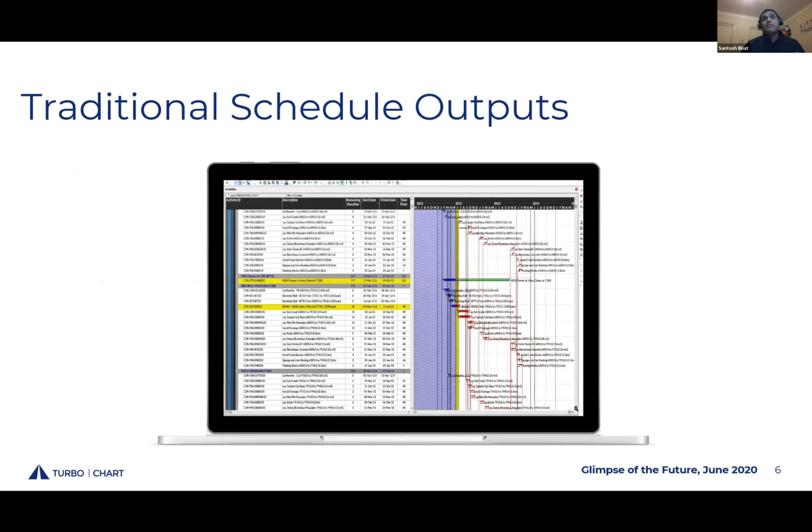It gets worse. When asked to deliver a schedule to someone who's not at a desk or hasn't got access to the software, this is what we do. We print out pages and pages and pages, and we ask them to review it, to analyze it, to understand it, and get back to us. It's a recipe for disaster, because unless you've got a very good understanding of how to interpret schedules and Gantt charts, output like this is not going to be very meaningful.

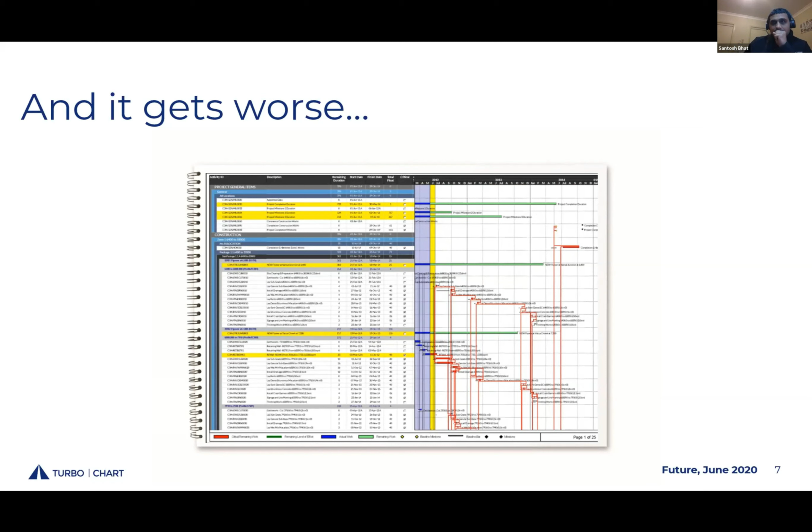However, and thankfully, on linear projects or linear infrastructure projects, there is an alternative method that addresses a lot of these problems and can help improve communication and analysis.

So let's step back a little bit. What are linear projects? Classic examples are shown on the screen there: highways, tunnels, high-rise apartments. Yes, high-rise buildings are linear projects in a way. Railways or pipelines as well, all considered as linear projects. They all share a similar characteristic where there's repetitive works, repetitive sequences of works that progress along the linear element of the project.

And they also interact with the more static elements. So that's a key element to think about as well. Linear projects have a very special factor to them. Let me explain that a little bit further.

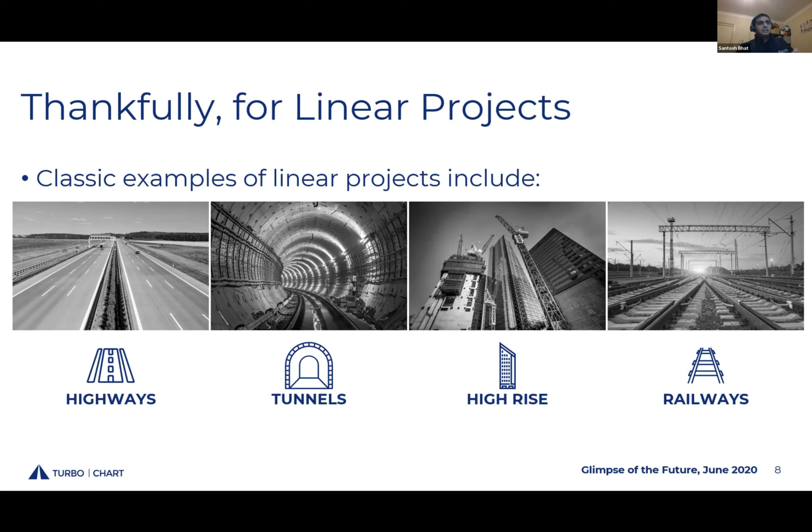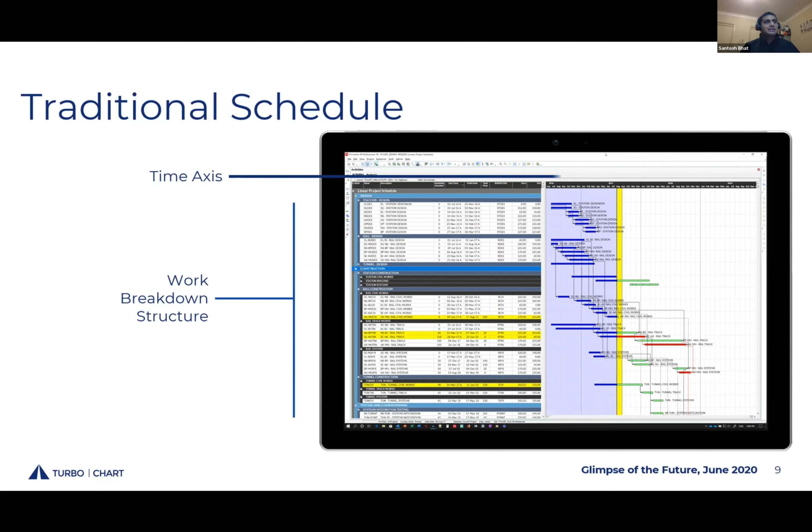When we think about a traditional schedule or program, this is what we see: a Gantt chart. It has a time axis that runs across the horizontal, and the vertical is usually some sort of work breakdown structure, a hierarchical way of organizing activities. You'll see the main features of these charts: single task per line. It's very hard to differentiate one task from another. What does it mean? You've got very little hope of understanding where things are occurring unless you've got some very sophisticated way of describing, grouping, or sorting activities into clusters.

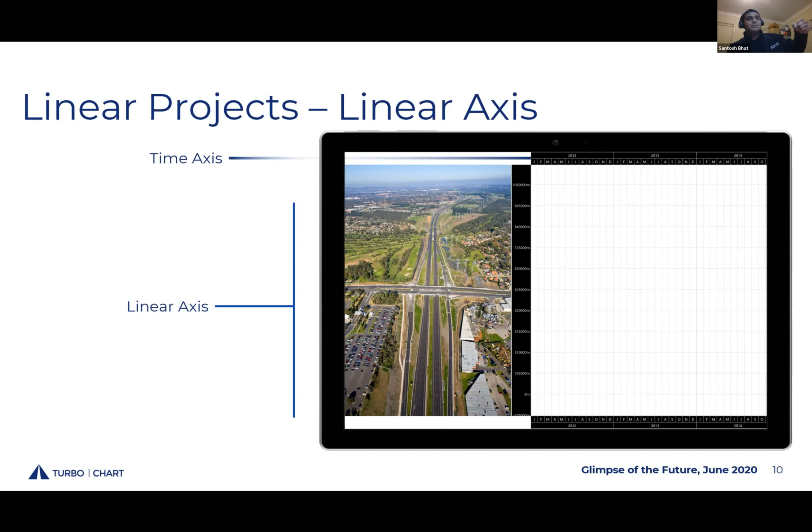So linear projects have an advantage in this space. Let's look at things slightly differently. Let's continue having a time axis across our chart on the horizontal, but the vertical axis is represented by the location along the linear axis, or the linear alignment of the particular project. If you think about a highway, it has a start and an end point, which represents that linear alignment. So let's use the linear element as the axis rather than a work breakdown structure.

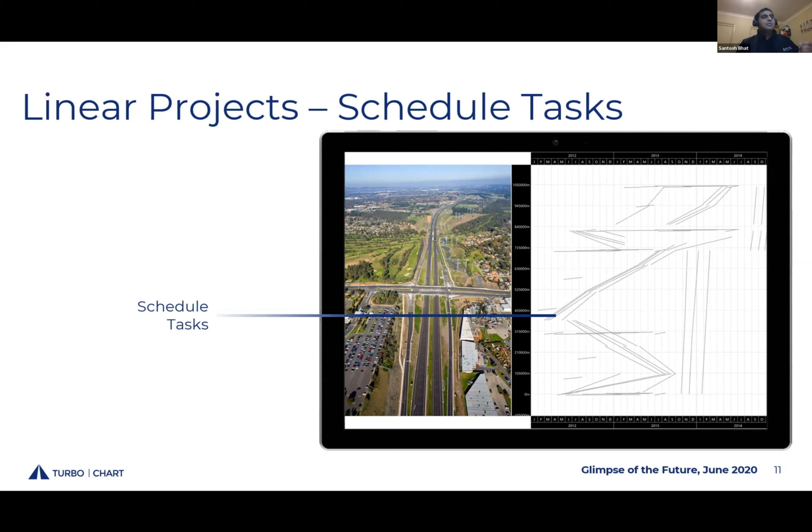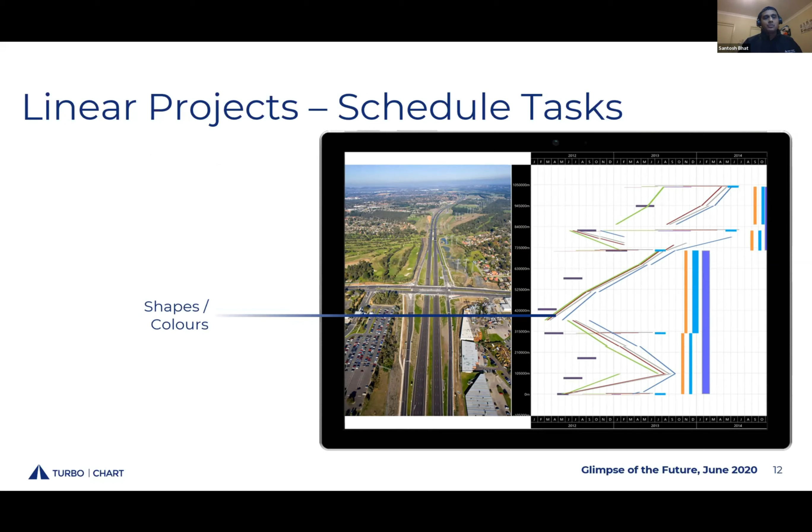Onto this chart, we can now place all our scheduled tasks or program tasks. They're no longer limited to being one per row, but they span over the time and location that we're specifying they occur. We can then use different shapes, colors, or styles that represent the actual type of work. So now you've got a much more meaningful interpretation of what a schedule says. You now know what's happening, where it's happening, and when it's happening.

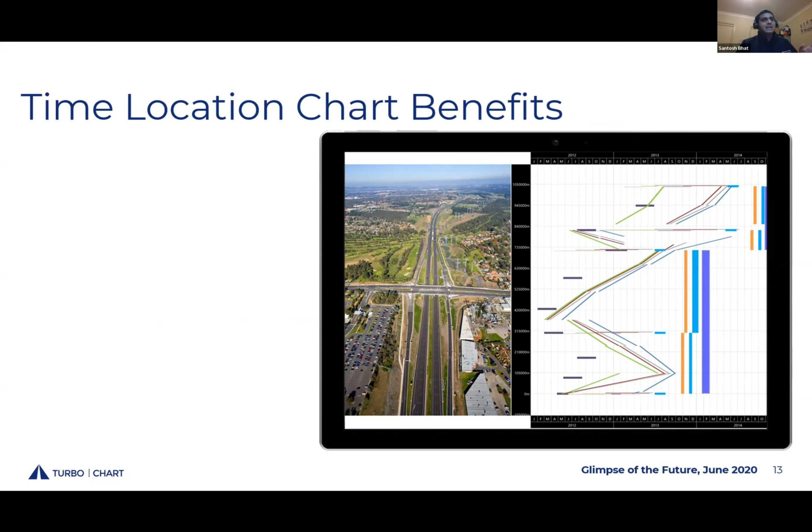So let's spin it around a little bit. Because the horizontal or location linear axis tends to be a bit more interesting, we tend to look at these charts in this orientation, except for vertical high-rise buildings, which are a slightly different way of looking at these charts. This is a typical time chainage, time location, linear schedule with the axes and the activities and tasks all being displayed.

What are the benefits of these charts? Very quickly, you can start identifying work and crew sequences. Where are the work crews operating? Which direction are they heading in? What's their rate of progress? The angles of the lines you see on these charts mean the speed that they're working at. A very shallow line means a very fast operation. A steep line tends to mean a slow operation.

We can also pick up things like clashes and errors, where lines intersect, or where there's multiple activities occurring in the same space and time. You can beg the question, is this feasible? Can we actually be doing this, or have we made a mistake in our schedule? In which case, you may need to revisit the way that the schedule has been constructed.

It's also possible to do schedule comparisons using these type of charts. If you think about comparing schedules, and we heard from DJ earlier on, getting involved in a lot of delay and claims type analyses, you want to understand what was our originally intended schedule versus what are we now able to achieve. These charts can be used for that as well.

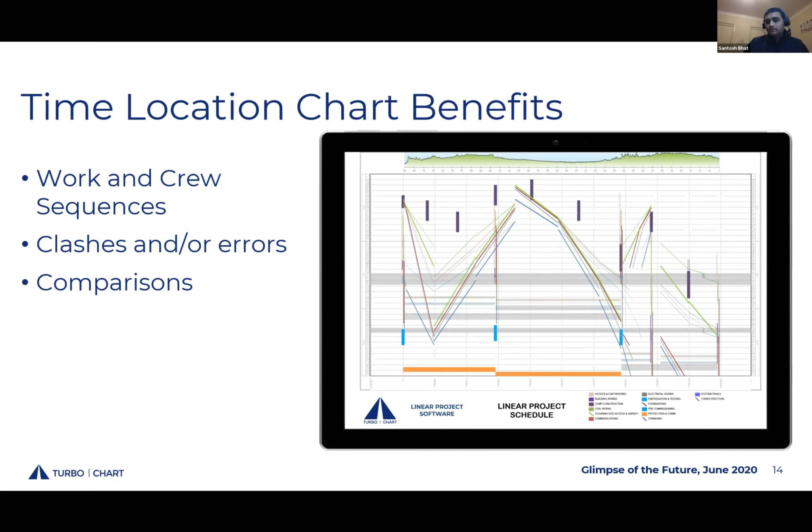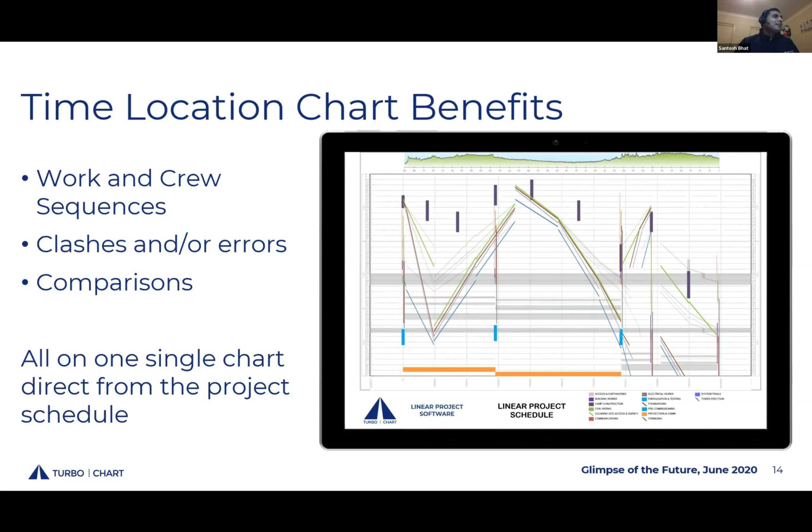So that's a bit of background. I want to talk a little bit about the main selling point, obviously, all on one single chart and direct from the project schedule. So I want to talk a little bit about one of the companies here in Australia. Most of our customers at present are in Australia, and a number of those companies are now making the product that I'm going to show you as their standard tool for doing this type of work.

But one particular case is a company called John Holland. They have a 70-year history across our region: Australia, New Zealand, Southeast Asia. They are a tier 1 contracting services. They operate in all types of areas around infrastructure and property development. However, they do have a focus on very highly technical and complex linear infrastructure type of projects. So there's two being shown there from our two largest cities in Australia.

There's the Melbourne West Gate Tunnel, a huge project that's worth just shy of 7 billion Australian dollars. And John Holland have been involved in the WestConnex motorway and tunnels, essentially about 30 kilometres of tunnels under suburban Sydney. Two specific projects there, multi-billion type of projects, very complex, very technical, very high risk, I might add, given all the elements of working in an urban environment.

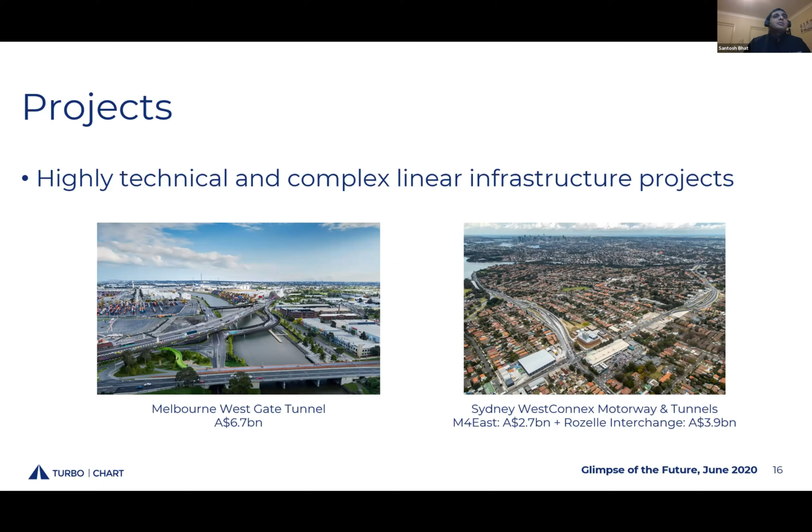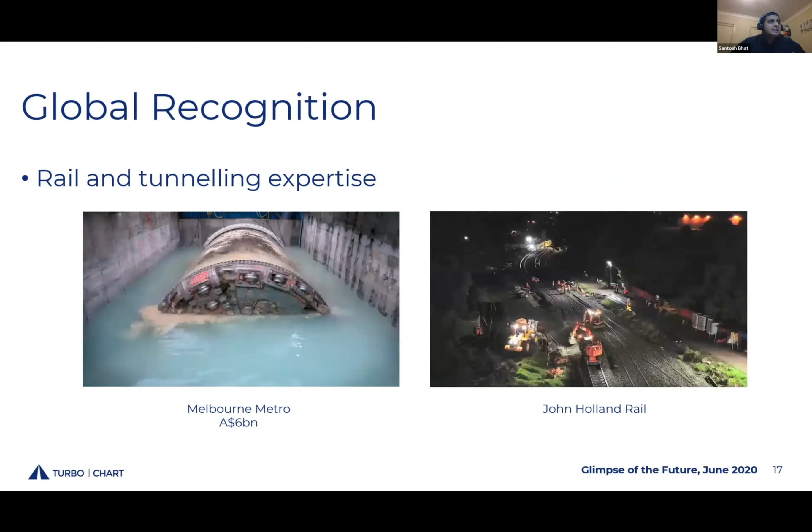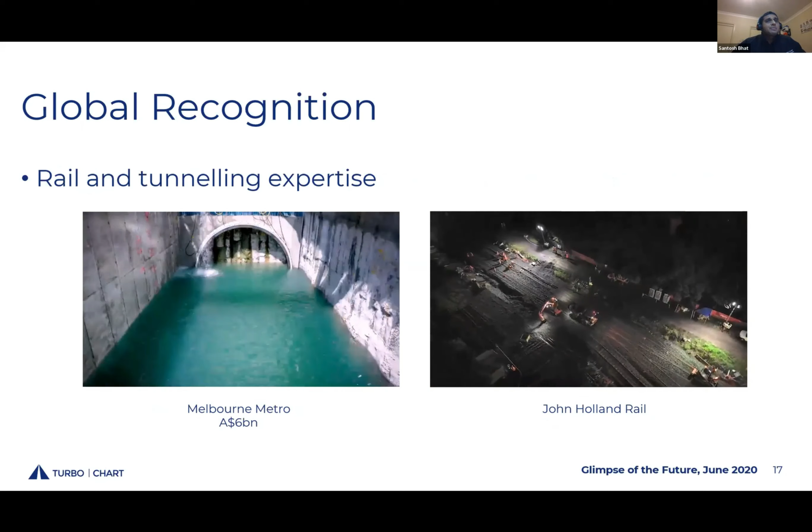John Holland in particular have, I suppose, a global recognition in their rail and tunnelling expertise. They're very well known for the ability to deliver tunnelling and rail projects. Certainly in Australia, they're considered as one of the best operators in this space. And on the screen there is a couple of videos playing of two of their projects and operations.

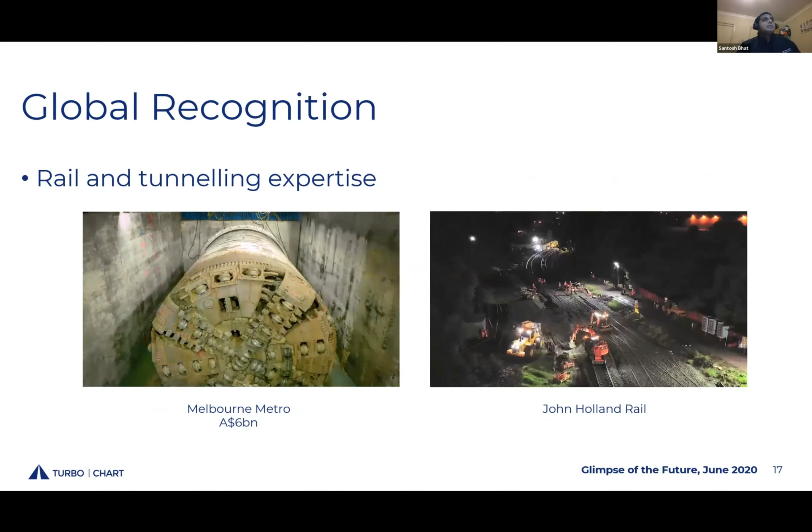So what is it about John Holland's planning and scheduling on their linear projects? First of all, John Holland has a very well-developed existing governance system around their planning and scheduling. They have a well-developed set of standards on how to produce schedules, from the full life cycle of their projects. And they have well-developed systems and tools that they use for planning and scheduling. So they're not looking to replace any of that.

They certainly recognize the benefits of time location charts on their linear projects, and given that they get involved in so many of these, they do try and encourage all their projects to produce these time location charts. They know the benefits of being able to communicate and analyze programs and schedules using this format. Why TurboChart? Why did they pick TurboChart in particular?

Number one reason was they said it integrates with their existing planning and scheduling tool, which is Primavera P6. It doesn't replicate, it doesn't duplicate - touches upon a common theme that we've seen across all the previous presenters, which is a single central repository for information. The risk in scheduling is obviously if you have multiple versions of schedules, you run the risk that not one of them is telling you the truth.

So the fact that our product integrates with Primavera P6 was one of their key selection factors. And because of that, it then encourages their programming, their scheduling and their planning to all be done in an integrated manner. It doesn't just extract the linear element and work on it in isolation. It actually takes into consideration design, commissioning, testing, procurement, etc. And obviously, with our tool, we provided a cost-effective solution that didn't require retraining or learning whole new methodologies or any sort of a large IT investment in licensing or infrastructure around that.

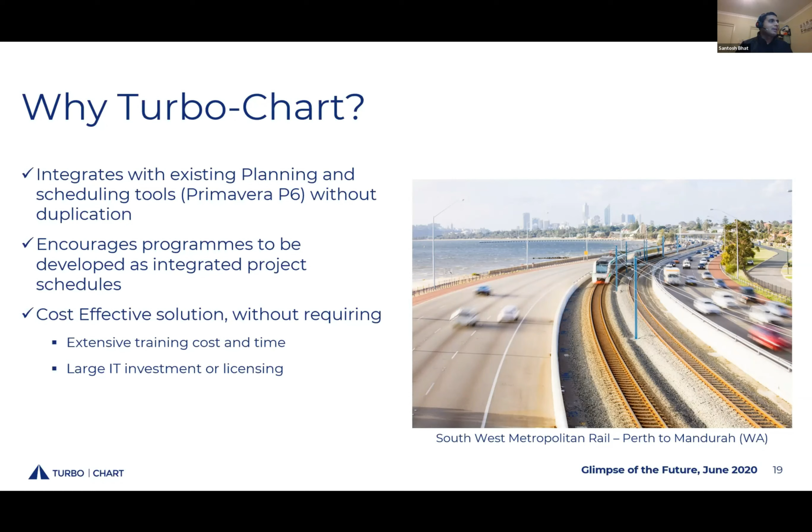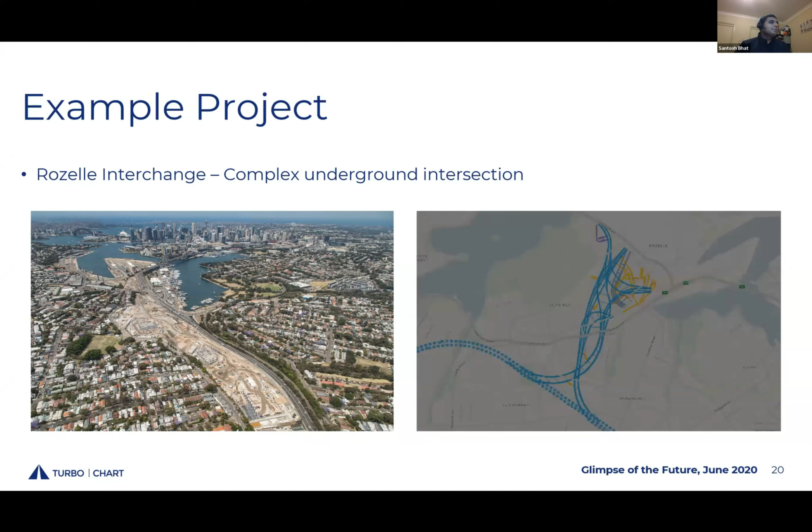And not continuous either. So while it might not seem like a linear project, it very much is so when you think about the tunnelling aspect. So they've given me the okay to give a version of one of their time chainage or time location charts of their projects. This is a one-pager that was used for this particular project. On this one page, you're actually seeing over 2,500 scheduled tasks, but within the image that you're seeing on the screen here, you can straight away identify the direction that the tunnellings are occurring in. You can actually pick up the sequences of which way the road headers are being used.

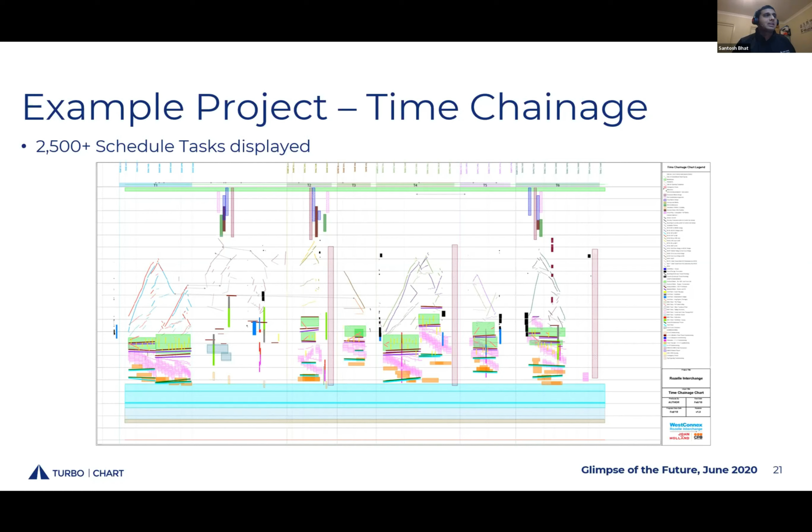You can detect when various sites become available, the handovers between the various segments from tunnelling to the back-end works, over to mechanical and electrical, and then the commissioning, all wrapped up nicely into one page. This is now the way that the schedule or program is communicated across the project. You can walk into any of the project offices, and rather than seeing hundreds of Primavera printouts laying on tables, you'll see one chart on the wall of everyone's desk, because that's what they use to communicate the timing of all the works.

Just some comments from some of their key staff members, I guess. What are the 3 best features of using TurboChart? It helps decision making, provides an overview of their program constraints and logistics, allows them to interrogate and do quality control on their P6 program, and the third point, allows the whole team to engage.

I love this comment: there is no way the site teams are looking at a detailed Gantt chart to plan their works, whereas the time chainage does produce a much more elegant way of presenting that.

Why did they pick TurboChart? I know a few other reasons. Obviously, as I mentioned, connectivity with their existing software for scheduling, and the ease of using it - very easy for their planners to pick up. We've had planners say that within a few hours they've been able to produce outputs and very quickly compare various scenarios. When you're working on these complex jobs, you're often doing a lot of modeling and scenario building to try and optimize the result.

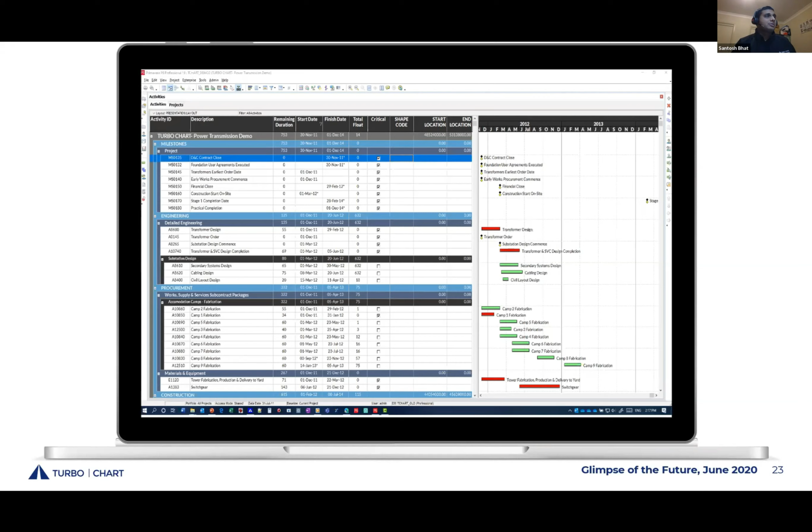Time permitting, this should take less than a minute - just a very quick demo of how TurboChart works. Essentially, we append additional data into user data fields that define what the task represents and where that task is occurring along that linear axis, and we add that information to the relevant activities in the schedule.

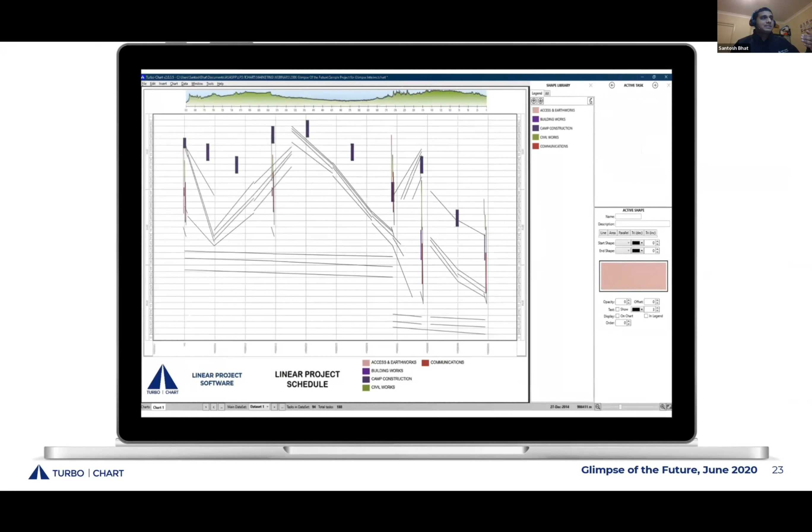Using TurboChart, we connect to our scheduling data source, in this case Primavera. We map those extra fields and import them in. Then it's a case of, as a one-off exercise, defining how we want everything to appear - green lines, blue boxes, each task represents a different thing.

As our schedule changes, as we modify logic, as we modify durations, add activities, the schedule itself will change, and obviously that means dates will also change. TurboChart is simply a matter of refreshing to go and grab the latest set of dates. We just press refresh, we'll see the dates, and we can see that again and compare it with a previous version of the schedule.

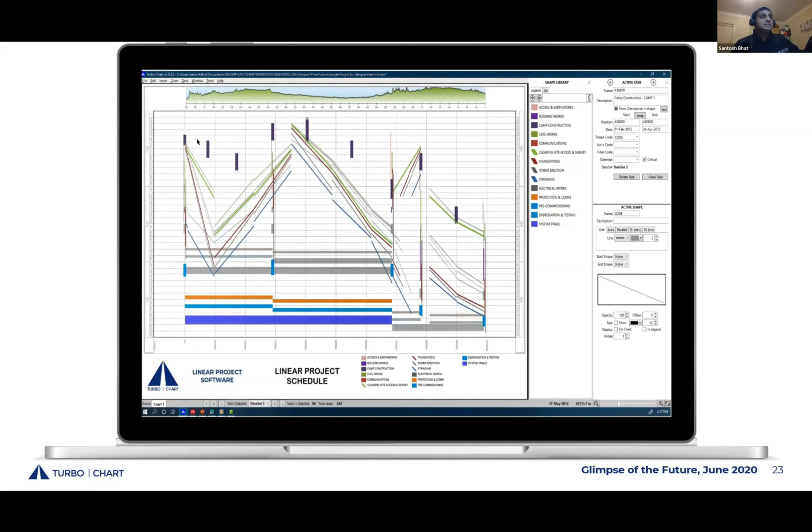And this is all real time - I haven't sped this up in any way. So that's actually how fast the import and refresh cycle works.

Just to touch upon the glimpse into the future: time location, time chainage charting is not a new phenomenon. There are actually recorded cases over a century ago of this type of method. What we've done is put a modern spin on it, to make it more efficient and easier using modern technology.

It's a desktop tool for the time being, primarily because most schedulers still use desktop tools, so we connect with their systems. But it's an open-ended technology that can be used for the future as well. We deliver updates over the internet fairly regularly. It connects with most popular scheduling tools - P6, Microsoft Project, Asta, Safran Risk, Safran Planner - and as mentioned, copy and paste.

So that's pretty much my presentation on linear time location charting for linear projects. Anyone's welcome to visit our website for more information or download a free trial of the software.

And I shall return back to you, Phil.

That was so impressive. Having been involved with you and Russ for the past year and a half, 2 years, it's been wonderful to see how your offering has developed. I'm just really impressed with the development of the product, the increases in functionality, and the way you tell your story.